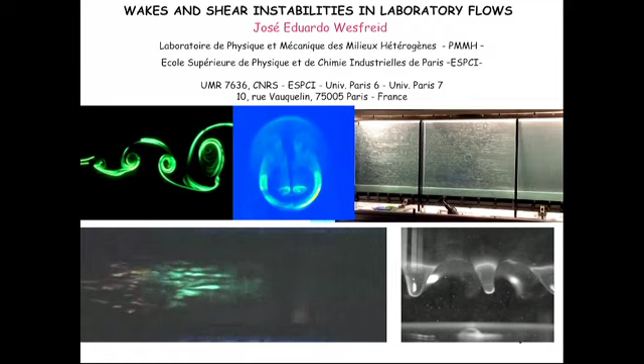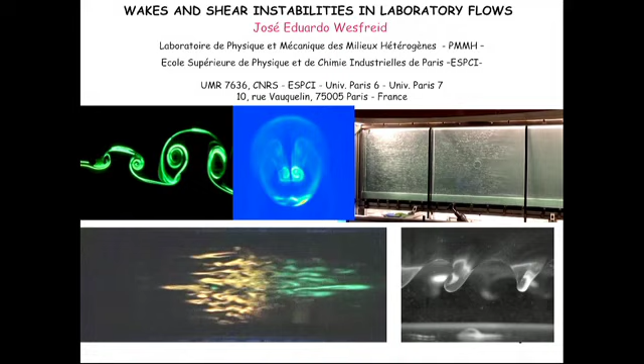As said by Professor Sweeney, my main activity is experimental, so I try to give you an explanation of how we do our experiments and our work.

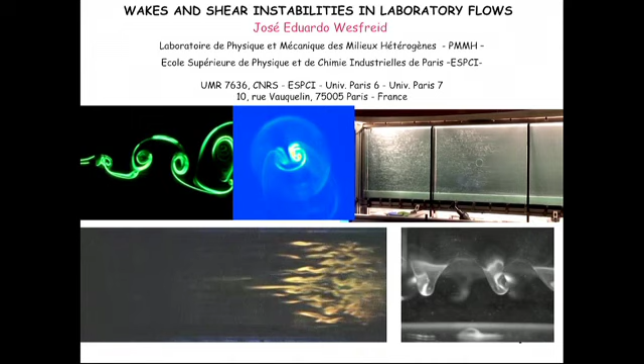So thank you again. I came from the École de Physique et Chimie of Paris, in France. Engineering faculties in French universities are normally what is called the big school. Ours is a small big school because we have no more than 70 students, but many teachers and professors, and we have especially an experimental activity to produce physicists and chemists as engineers, with a lot of innovation.

But also a lot of history, because it's the place where Pierre and Marie Curie discovered radium, and they discovered it essentially because they were very good experimentalists.

With Marie Curie, they found new chemical elements, but essentially because they had in their hands a very strong instrument. This is very important to know, this history of Pierre and Marie Curie.

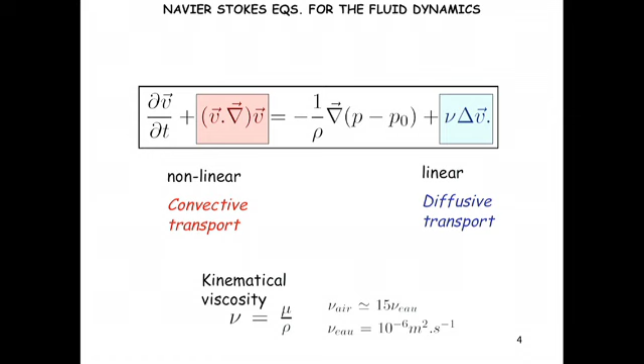So first of all, concepts about typical size and typical times. For diffusive phenomena, remember that the typical distance is related to the square root of the time, with the kinematic viscosity as the prefactor. Kinematic viscosity is the coefficient of diffusion of vorticity, which is very useful for doing problems.

The typical time is the square of the typical distance in your problem divided by the kinematic viscosity. For example, you have a sharp profile of velocity - this profile diffuses with this typical time and typical size.

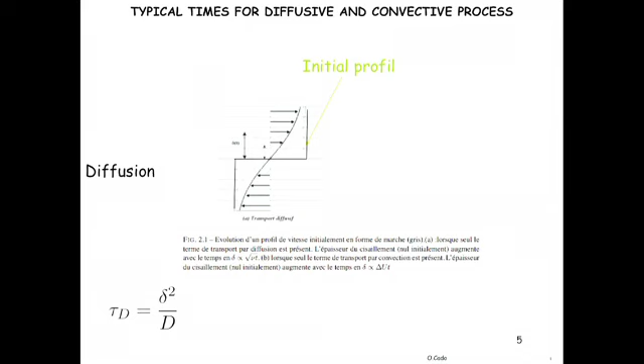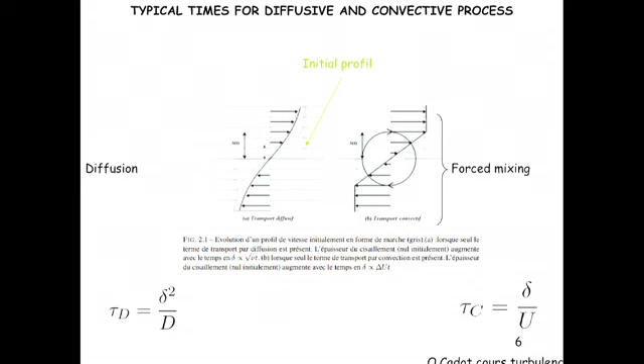For the opposite case, when you have convective phenomena, you have mixing by vortex, for example. Here you need to consider another time, with its typical velocity and distance - for example, the return time of a vortex. With these typical times, we go on to explore all the phenomena of fluid mechanics.

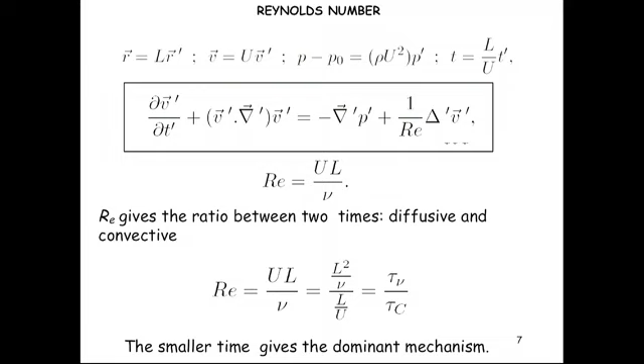If you take the Navier-Stokes equation and make it adimensional with the typical size and typical velocity, you find the Reynolds number, which is the product of the typical velocity and typical distance divided by the kinematic viscosity. This Reynolds number is no more than the ratio of the two typical times: the time of diffusion and the time of convection.

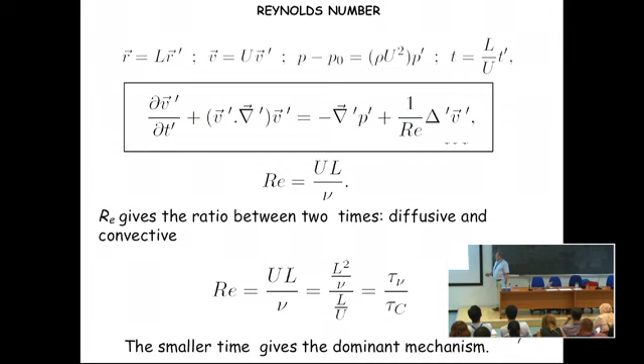For example, if the diffusive time is low, you have low Reynolds number behavior, with more diffusion - normally the smaller time gives the dominant mechanism. This is a small introduction, since there may be people who didn't necessarily take or don't remember the time when they learned about fluid mechanics.

Another important point in fluid mechanics: many times you have strong velocities, you have inertia, and you have separation, especially when you have an adverse gradient of velocity - higher velocity, lower velocity - and you produce this kind of separation. This is a very important problem, for example, in airplanes. If you take a higher angle of inclination of the wings, you produce this separation and have a problem with lift. This is an important problem in aerodynamics, in fluid mechanics.

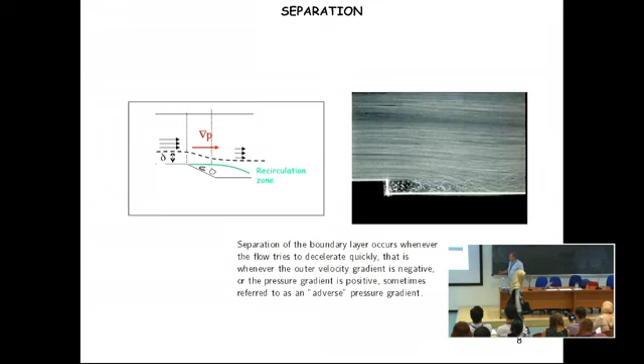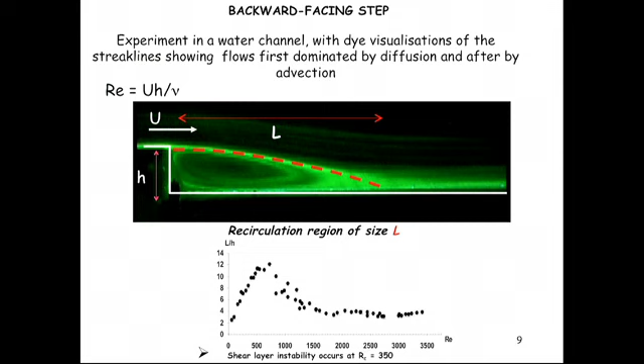So I use this separation to produce fluid instabilities. Here I have a region of dead water fluid with higher velocity here and very low velocity there, nearly slow motion. So I have the condition for flow instabilities.

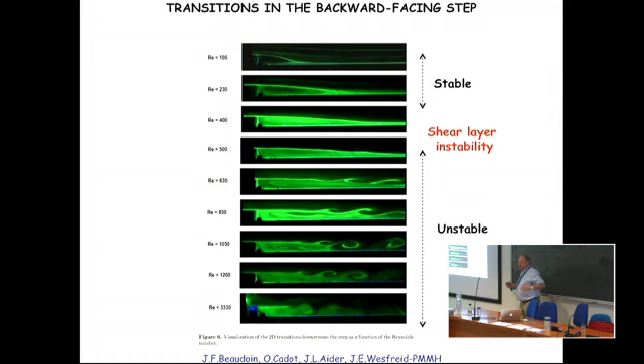If I grow the Reynolds number in this flow visualization in our water tunnel, I can show two important points. First, the recirculation length, the size of the recirculation, grows with the Reynolds number. But at one moment, you have fluid instabilities, and you observe this vortex with vorticity normal to the wall. Then, more intense the vorticity, the recirculation length shrinks. So essentially, the recirculation length grows in the beginning for the stationary flow, and in the end is constant because of this shrink.

How can I understand this phenomenon conceptually? In the beginning, I suppose I have slow velocities, and the diffusive phenomena is more important. So if I have velocity here, by diffusion the velocity comes to this point, the backward facing step, of height h. Higher velocity here, null velocity there. By diffusion, the velocity comes from here until here. What time does it take by diffusion to come from here until here?

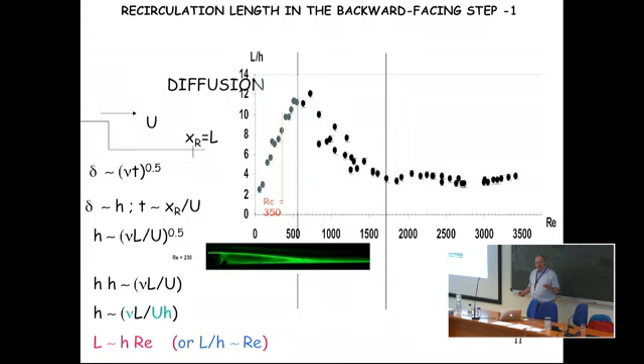This distance is the square root of nu t. Delta is this distance. What is the time? It's the time to go from here until the end of the recirculation length, so it is L divided by U. I put this inside, transform with the Reynolds number, and find that L, the recirculation length, grows linearly with the Reynolds number, which is what I observe. So this diffusive mechanism explains the growth in the beginning of the recirculation length.

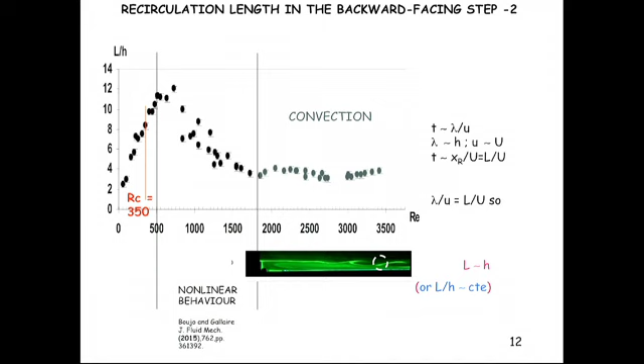What happens in the end? In the end, I have strong vorticity, so the typical time now is the time for this vortex to turn. This time is the wavelength, the size of the vortex, divided by the typical velocity, on the order of magnitude of the free stream velocity, since I have free stream velocity here and zero there. In this time I need to go from here until here, the recirculation length divided by the velocity. So I observe that L is proportional to H, meaning L divided by H is constant.

So I have two behaviors: small Reynolds number is diffusive, big Reynolds number is convective or inertial. But in the middle is the problem, because it's not very clear what the law is in between these two states, and this is an open subject, very active. There's a paper from last year from the group in Switzerland on how to understand this very nonlinear phenomenon, taking into consideration the two extremes.

I spoke about the water tunnel. It's not a tabletop experiment, but nearly. It's the smallest water tunnel in the world. Normally in your universities, a lab of mechanical engineering or aerodynamics has a whole building for a water tunnel. First of all, we are in the center of Paris, and the square meter is very expensive, so our water tunnel is no more than half this size. A small water tunnel you can build in your institute, because if you have a workshop, it's only plexiglass. You have holes and plexiglass, no more than this, and it's very efficient because you can do basic physics and applications.

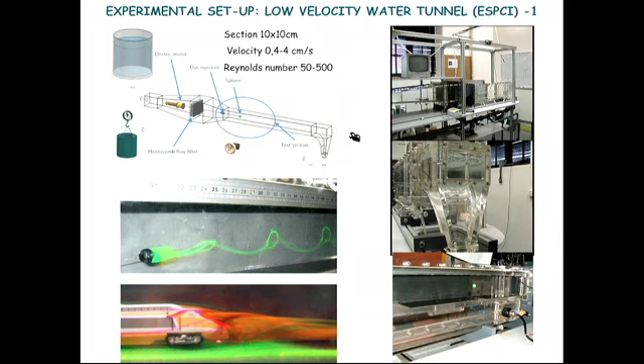You can study many problems with small reduction models, for example flow control in the TGV, the high speed train in France. There's no opposition to this approach, so afterward I can help if you have ideas. There's another small water tunnel at Linköping University, but here's an important point about what you see in fluid mechanics.

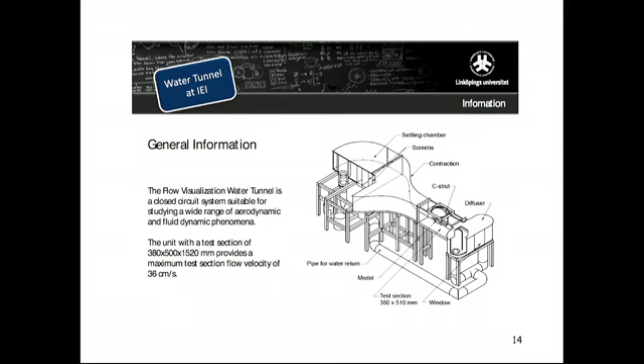Attention: what you see is not necessarily what exists. Bizarre, why? Because one thing is the streamlines. Streamlines are tangent to the velocity vector. In stationary flows, no problem. What you see here with particles, with the trajectory, the streak lines I'll speak about after, is what really represents the streamline. What's important is the velocity.

We use PIV, the method to measure the velocity, and we take pictures. It's very important to try to measure this tangent vector to the velocity of the flow. But what happens, normally we put dye in one point. The dye is transported until here. If the system is not stationary, each time this molecule of dye observes a different motion.

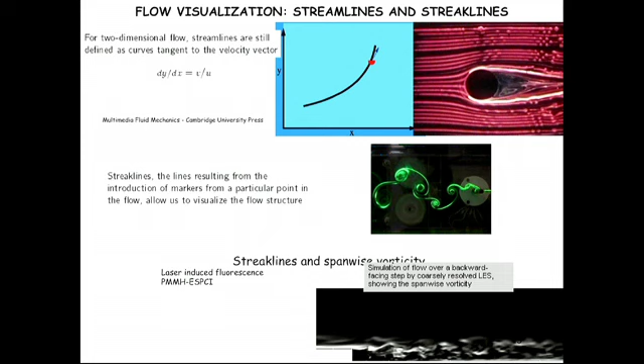In one moment, this dye here was up here, but this particle came from one time before, and this from other times, shorter here. Each particle you see has a history from the exit of the dye until the moment you take the picture. It's very complicated because it's this integration of the past.

There is an unstationary flow. It is called streak lines. Streak lines are not streamlines - remember this. This is a typical error of people doing numerical work, trying to show this. No, you don't show this except you put particles in your code and follow the particles.

But normally, if you like to see what happened, what you see in visualization seems similar to vorticity.

Flow visualization is very old. Marey was working in this, at the end of the 1800s, he built this wind tunnel. He is the same guy who invented cinematography, and at the same time, he was interested in studying the flow, flow visualization.

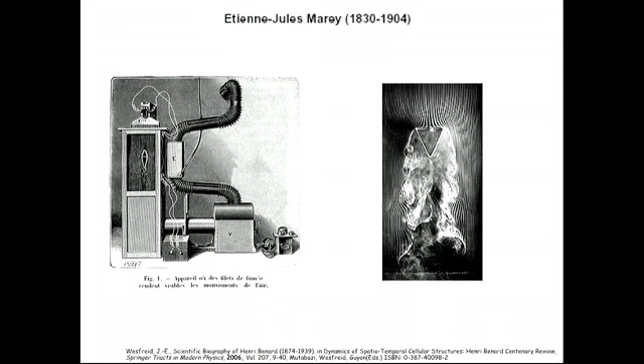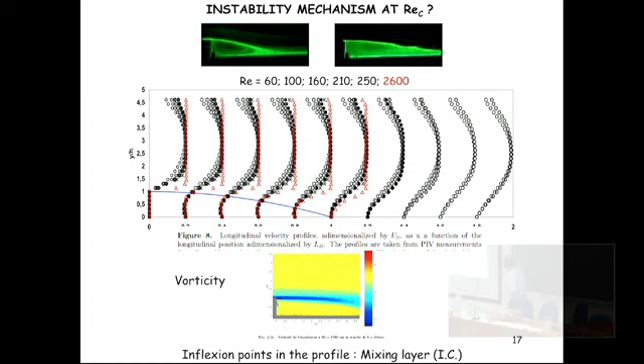I come back to the backward facing step. What happened? I have this profile of velocity, I have this inflection, I have this strong vorticity here, here is the recirculation, the free wake. I try to understand why there are these instabilities.

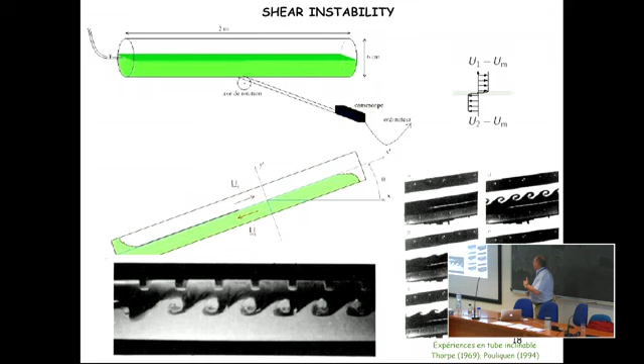This is some kind of shear instability. A typical example of shear instability: if you have two flows like this, you incline this tube, and you can see this typical Kelvin-Helmholtz instability or shear instability. It is very typical in many problems of fluid mechanics.

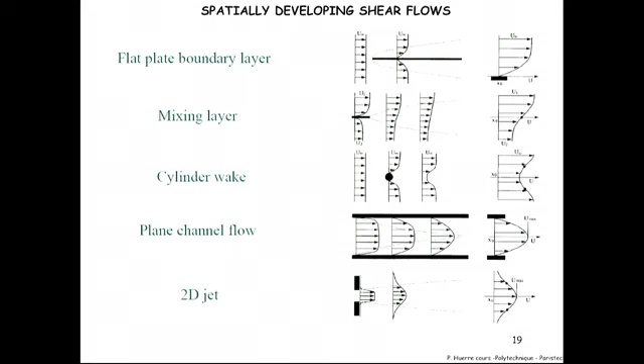For example, many times you have this flow with this strong gradient - in the case of Poiseuille flow, in the case of Couette flow, in the case of the wake after a cylinder, the mixing layer. This is very typical. What you do to study this is study linear stability.

So you take the flow equations, for example the 2D equations, you separate the flow into the basic state, and you add small perturbations. Since the perturbations are very small, you take the linear approximation. That is the linear problem of the Navier-Stokes equations.

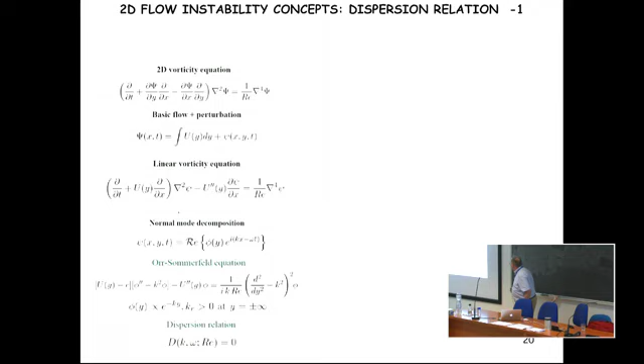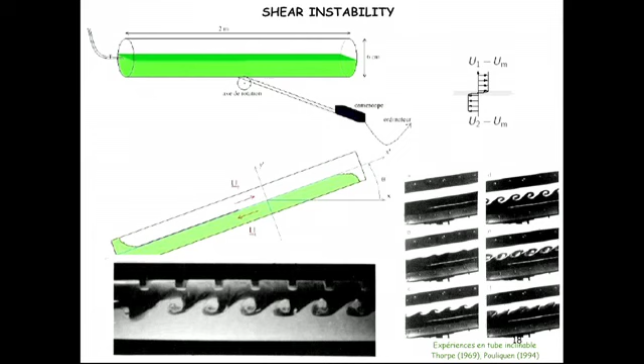You suppose that this perturbation has a normal form - it's a wave, if you want, with a wavelength, or wave number k equal to 2 pi divided by wavelength, and a frequency, an imaginary frequency. If the imaginary part is positive, the flow explodes. What you try to see is the dispersion relation - the relation between the wave number and the frequency for each Reynolds number, to see what happens.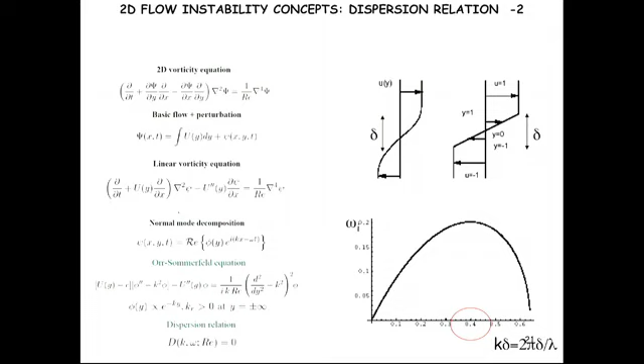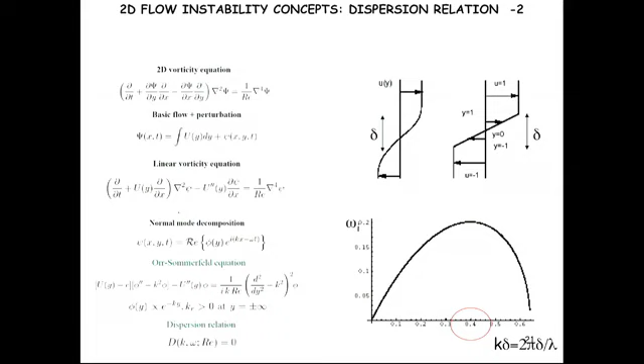So normally I expect to see this wave number or this wavelength. Remember, very important: in almost all calculations for these flows, if I do a hyperbolic tangent here for this mixing layer, normally this value is 0.39, 0.41, very near 0.4. If you need the order of magnitude, remember 0.4 as the typical wave number.

And from this, I go to the more typical problem of vortex shedding, the more typical open flow instability, which is the Bénard-von Karman instability, because Bénard observed this in 1908, and von Karman gave the theory in 1911.

So before Reynolds number 47, nearly 50, you have two stationary wakes behind the cylinder. But at one moment, from Reynolds bigger than the critical Reynolds, you have this alternating vortex shedding with emission of vortices - and this is the important point. This is the cylinder, an infinite cylinder, and these are the vortices.

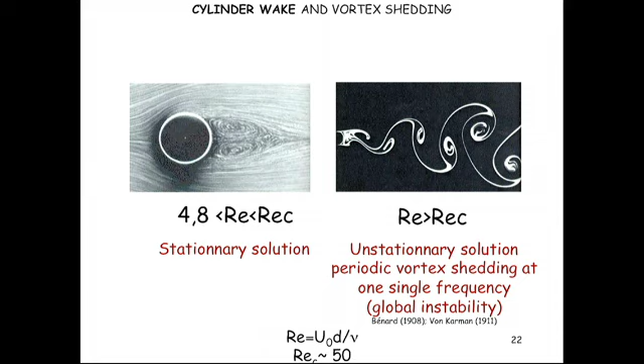The vorticity is parallel to the object, span-wise, not stream-wise. I'll come back to this.

This was observed by Leonardo - a very nice picture of Leonardo, who was observing nature, and nature has a lot of this kind of vortex behind a bridge. You can also observe this by satellite, because with a small mountain you have nearly a 2D problem in the atmosphere, and you can see the emission in the atmosphere with clouds.

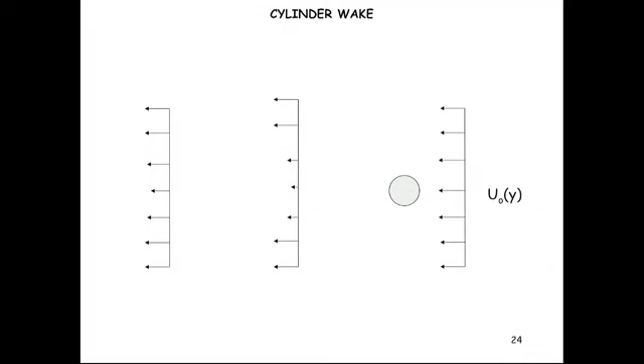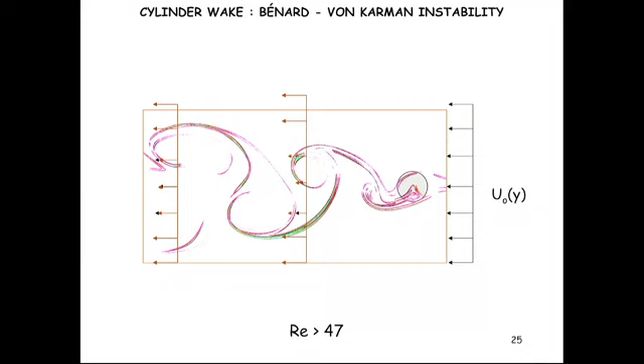So essentially, you have a uniform profile, you have the object, the cylinder, and you have the wake. So this wake produces this shear instability - and this is the instability. An important point: there is a very big change in the basic flow due to the existence of the instability, and this is an important point I need later.

So I have an experiment in our water channel with fluorescein as dye, and you can see it is really a hydrodynamic horloge, a hydrodynamic clock, because they are very clear.

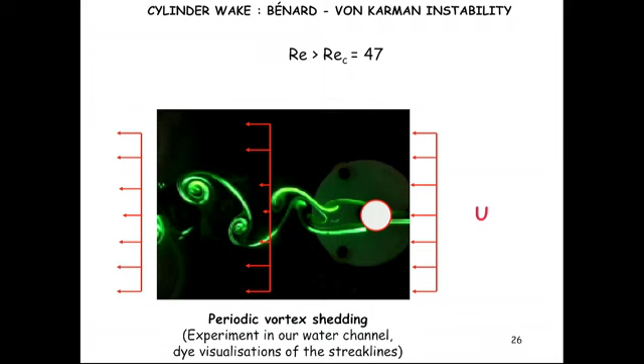This is an absolute instability, very clear frequency, and attention, the wake does not grow until... it is what you observe, what you see. But in reality, if you take measurements, the perturbation grows and after decreases. And the typical size, where the maximum is, is the correlation length in this hydrodynamic instability.

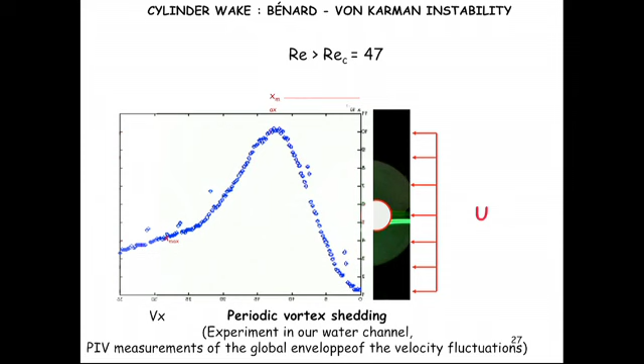So in this case, you have the dispersion relation. I remember one point: why is there a cutoff wave number? Because if the rolls are very big, for example small wave number, the shear is very small, so small growth rate. If the wavelength is small, big wave number, you don't see the shear.

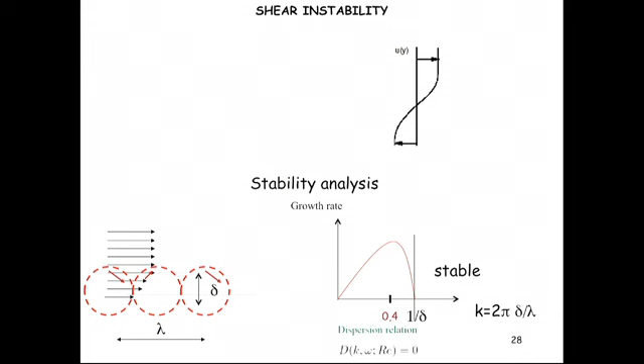So it is the reason there is a cutoff and this part is stable. Another situation, for example, if you have a non-miscible interface between the shear, you have the cutoff given by the capillarity, by example. So the cutoff is given by the capillary wavelength. But here, the cutoff is given by the geometry of the flow.

Order of magnitude of the frequency, order of magnitude. Remember, the 0.4 is the wave number with the maximum growth. So 2 pi delta over lambda. What is the typical size? The typical size of the shear is the half of the diameter.

So you can observe that the wavelength following the dispersion relation of the shear instabilities is of the order of 8D, as an order of magnitude. So if the frequency is the phase velocity over the wavelength, and the phase velocity is smaller than the velocity u, you arrive to obtain that the frequency...

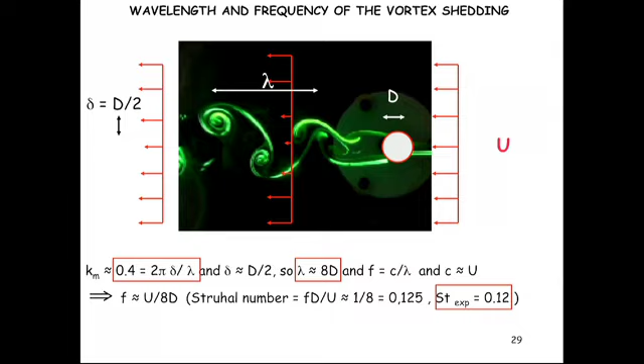...is this value. Normally, the frequency is measured with the Strouhal number, which is the nondimensionalized frequency multiplied by diameter divided by u, is 0.12. It is not exact, but if you have an instability and you observe that the Strouhal number is 1, surely it is not a shear instability.

The order of magnitude, when you have this typical Strouhal number of 0.12, you can do the calculation, so you can observe you are in the right kind of instability. The real Strouhal number is this.

The Strouhal number grows in the beginning from this onset and after is constant, and it is a nonlinear oscillator with the frequency proportional to the square of the amplitude, but the amplitude is proportional to the square root of the distance from the onset. So you have the law of the frequency.

It's important because it's an industrial application. Because if you put in your pipe, for example, a cylinder, and you take a capture of pressure, you can measure the pressure of the vortex shedding, and you relate the frequency to the Reynolds number, to the velocity, so to the flow rate.

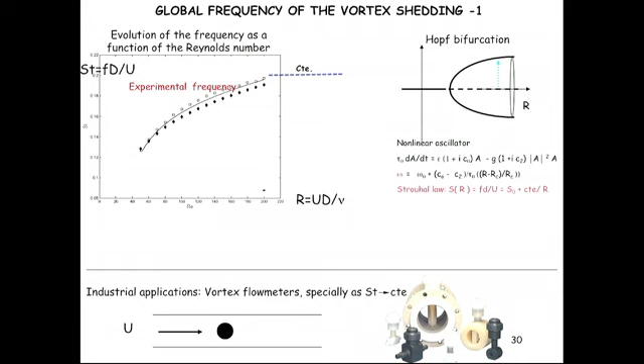As this, you have many, many sensors to measure flow rates in the industry.

But another big problem is, it is what we observe. We observe this frequency. But if you do the calculation of the linear theory, it is this law. So there are discrepancies between the global calculation of the frequency and what you observed.

And what is the reason? Because these measurements are calculated on the basis of the basic flow at each Reynolds number. But I say, normally, the fluctuation by nonlinearities develops what is called a zero mode, a stationary modification of the mean flow. And this modification of the mean flow has a strong importance.

If you do the calculation, as many people do, not taking the real basic flow but the mean flow, you obtain the correct result. This was suggested many years ago by Malkus, to understand turbulence: take the mean flows and do the linear theory, but with the modification. This is a very important subject of discussion today.

And one important moment to observe that these nonlinearities really exist is you see the recirculation length behind the cylinder. What happened? The recirculation length grows, as I showed you before, linearly with the Reynolds number. And afterwards, the instability begins to shrink it.

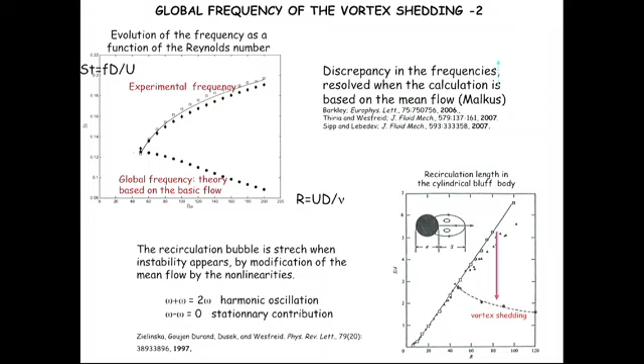And the difference between the length before and this length is due to the fact that, as the perturbation grows, it puts an additional mean flow that stops the recirculation. And this is the more macroscopic effect of the nonlinearity. You can see this, okay, the strong reduction.

One point about force. This vortex produces force on the objects. You can estimate, if you take, by Saffman, the moment of vorticity in the vortex street, and approximate the velocity, the force is proportional to the derivative of the product of the circulation and the distance to the central line.

So bigger is the circulation, bigger is the force. Smaller is the distance to the central line, smaller is the drag, for example.

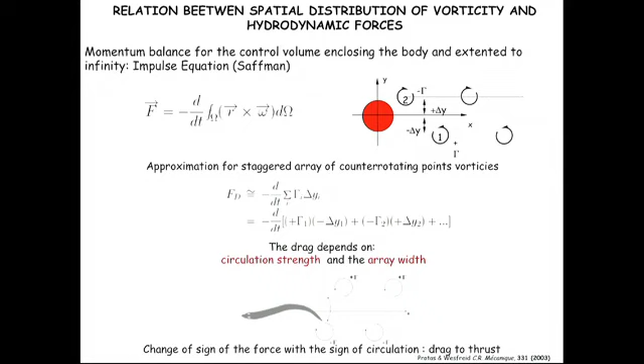By example, if you change the sign of the circulation, you change the sign of the force. And you are in the case of fish propulsion, because there is the emission of vortices, but reversed by the Bénard-von Kármán street, which produces drag. But if you change the sign, in this case you have not drag anymore but thrust, okay?

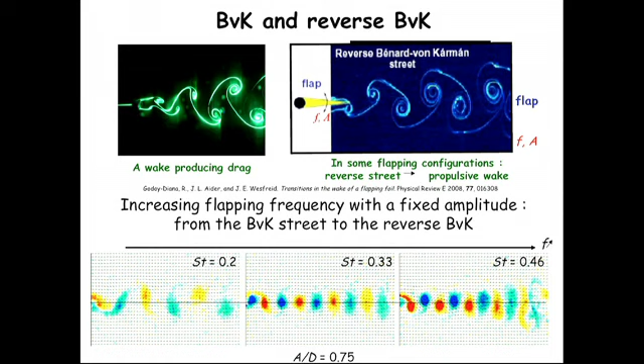And this is interesting because what happened? Many birds have a Strouhal number calculated about the amplitude. You take this amplitude of the flapping, multiply by the frequency and divide by the velocity. Almost all birds are around 0.2.

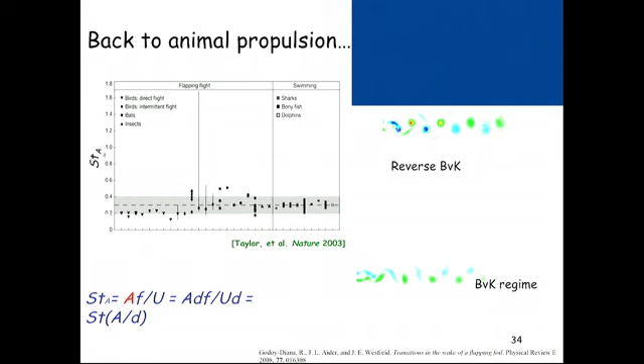And what happened? We have measurements with some flap, okay. So in this kind of frequencies we have the Bénard-von Kármán street, but we can observe for higher frequency this reverses. And this reverse, we can measure the force, and this is the line which changes from drag to thrust. And this line is at Strouhal 0.2, as observed in nature.

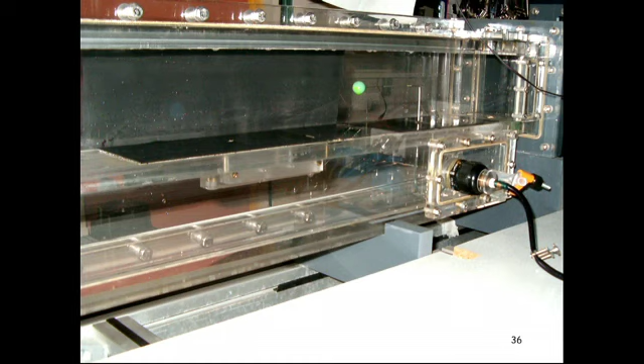I spoke about vortex shedding, about, if you want, two-dimensional objects. But what happens when the vortex shedding occurs behind 3D bodies? By example, a sphere. I go to my water channel, I put a sphere here, and we try to study what happens. First of all, I compare the 2D problem to the 3D.

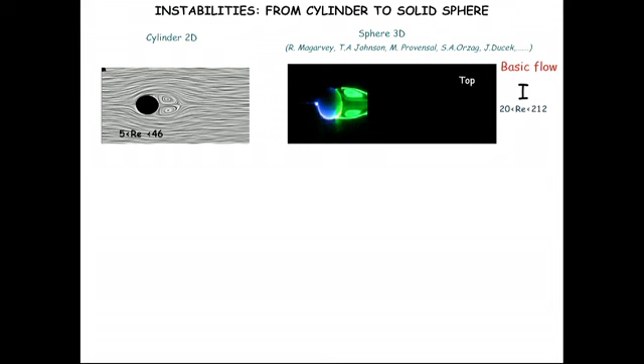In the 2D case we have two recirculations. In the case of the sphere, I have a torus of recirculation, an azimuthal recirculation. At one moment, this azimuthal recirculation loses symmetry. One part of the torus, by example here, is bigger than this other part of the torus. And this produces two counter-rotating vortices, stationary.

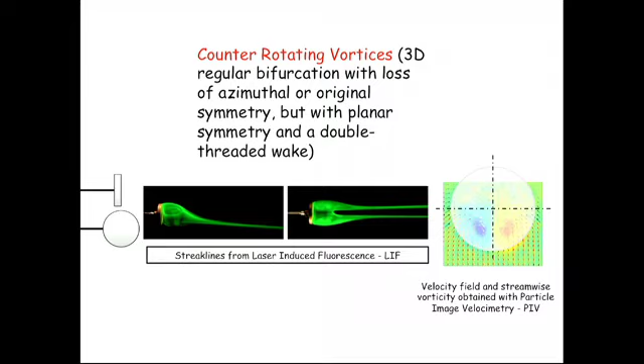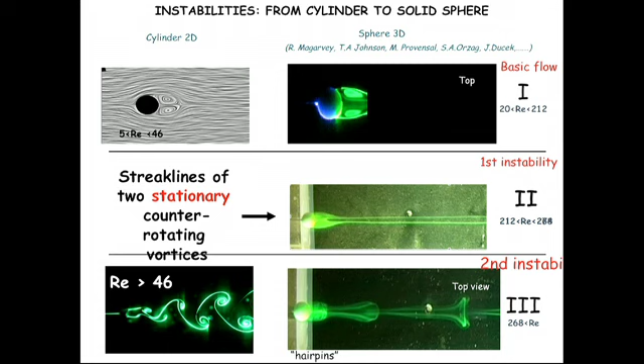So the first instability in the case of a sphere or a disk is the existence of the breaking of the planar, the axisymmetric symmetry. And I produce two counter-rotating, very weak, small vortices, okay? And after this, this is the situation, for example in the case of the sphere between Reynolds 212 and 270: this stationary instability, and after we have vortex shedding in the form of hairpins, okay? And this is what you observe.

This is the typical hairpin, okay? So you can see from the side, from the top, or in front, okay. It is the typical vortex shedding.

One important point for fluid mechanics: what is important in the hairpins is the legs, this part, because these legs mix very well. The head of the hairpin seems not very important. I say seems because it's a very strong discussion today.

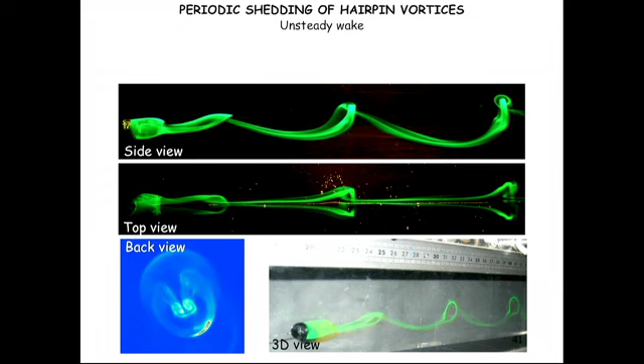To give an idea what happened, perhaps you can see it in drops falling in water. Imagine a bubble, it's a sphere, I suppose the bubble is rigid. So in the beginning the bubble grows, the Reynolds number grows until 212, and the two counter-rotating vortices appear to produce lift. So this lift puts it at an angle. So the bubble arrives here and deviates here, stationary.

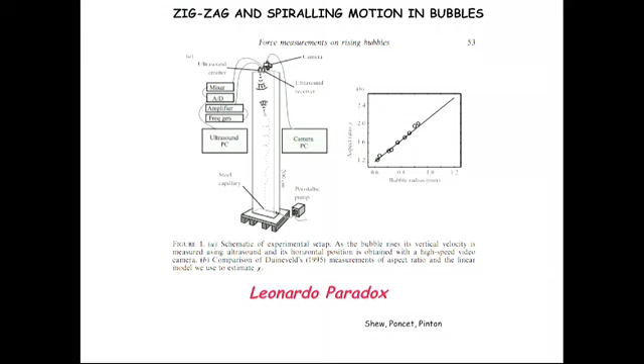And after, there are the hairpins. So I have the zigzag, and a higher instability is this kind. So you can observe this when you have a drop, this sequence of instability. Perhaps you can observe this in a bottle. Okay? Good.

And then, it's important because I come back to the head. Now we have experiments where we turn the sphere, because the interest is to study wind turbines, okay? So, but it's very similar, okay. The interest is, and what happened here is...

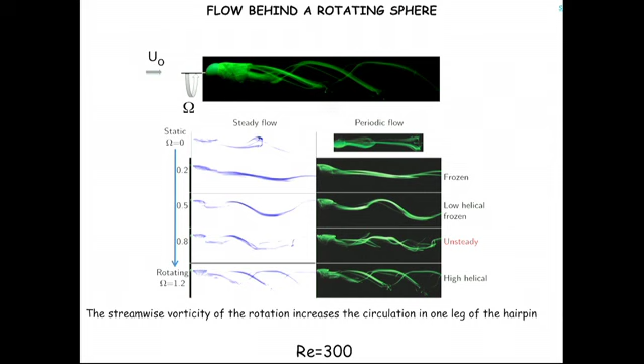If I put rotation, I add vorticity at one of the legs and diminish the other. So the hairpin disappears and you have a helical mode. And almost in this situation, the hairpin is a very short region, and you have different helical, higher order helical modes. Okay, good.

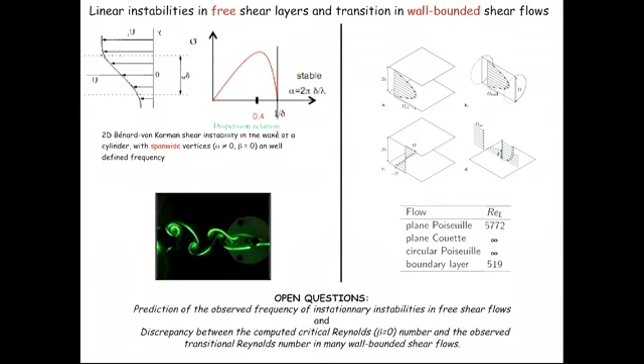Attention. Is what I explained valid all the time for all shear flows? No. Because if I apply this concept to Poiseuille flow, plane Couette, pipe flow, even boundary layers, what happens is you can calculate the critical Reynolds number. By example, in the case of plane Couette, it is stable all the time. In pipe flow, it is stable all the time.

But in reality, you can observe critical transition at Reynolds numbers less than the linear prediction, even if linear theory says it's all the time stable. This is because there exists subcritical transition to turbulence with the existence of very localized structures, spots. It is one spot in our channel. These spots essentially have streamwise vorticity, not spanwise like the Benard von Karman vortex. And they are sensitive to finite amplitude perturbation.

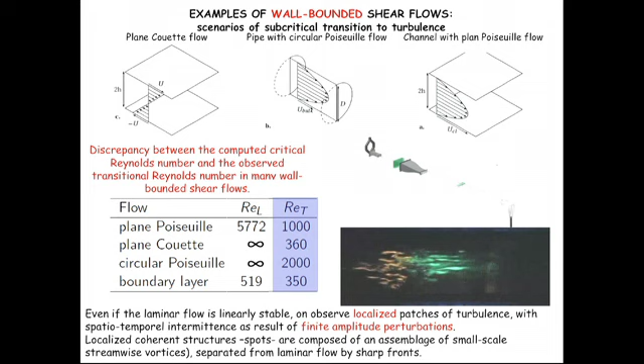So in the case of wall-confined shear flows, we have a different situation. Why? Because near a wall, I have a strong gradient, and the streamwise vortex mixes, putting high momentum from here to the wall and the opposite. It's not the same scenario I discussed at the beginning with the Benard von Karman case.

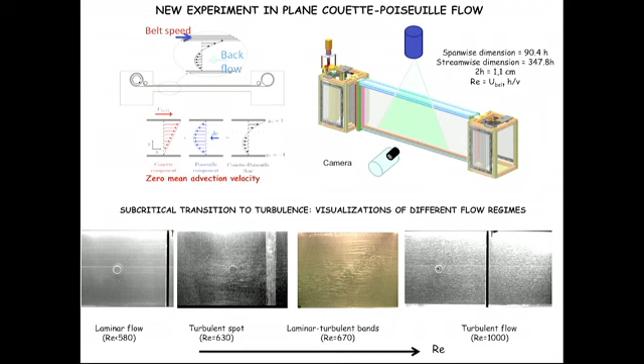This is the reason why you have a very different situation even with shear, due to the existence of wall bounding. Now we do an experiment to produce Couette-Poiseuille instability. We have a moving belt here and a fixed wall here. The Couette flow pushes water from one side to the other, it comes back, and we can see laminar flow, the existence of spots, bands, or full turbulence - this is one of the subjects used to understand the existence of these kinds of transitions.

Another important point about streamwise vortices is what occurs in reality - take an object like your car. Behind it you have a spanwise recirculation, but like the sphere or the disk, there are many very strong streamwise vortices behind your car. These, behind, are weak in circulation, but they're important because 45% of the drag, the pressure drag in your car, comes from the vorticity behind it.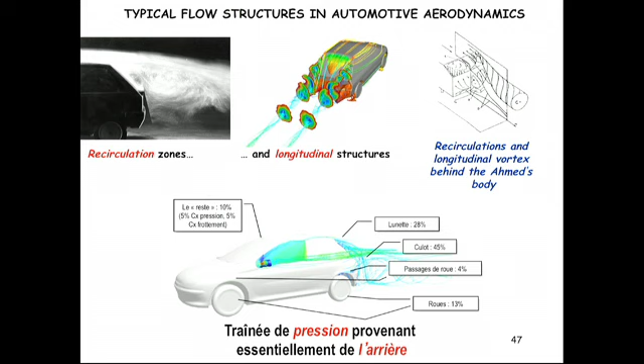So it's important to modify this hydrodynamics. For this, we can put counter-rotating vortices using vortex generators. For example, we have here a solid vortex generator which produces a pair of counter-rotating vortices that interact with the body to modify these big structures, with a very important effect.

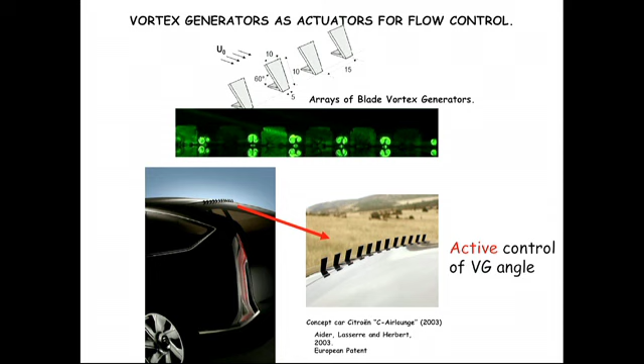Normally you cannot use this solid generator on a car, but you can put a jet in cross flow - you blow, and this jet produces two counter-rotating vortices. This is what is used today as the vortex generator applied in MEMS, in very small apparatus.

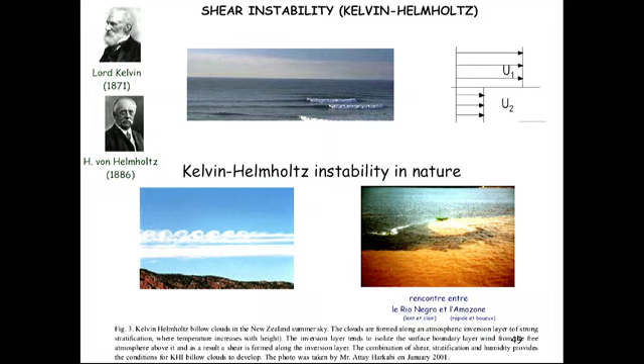To finish, I come back to the Kelvin-Helmholtz instability, shear instabilities. I said before the cutoff was given by the size of the boundary layers, but if you have an interface, the capillary effect doesn't like to have a very small radius. So I will show you a Kelvin-Helmholtz instability and shear instability, but with an interface.

I will produce this in the following way: I have two immiscible flows, water here, and on top a very viscous oil, and I try to produce an oscillation. What happens with this oscillation? I generate a Stokes layer. You know, by skin effect, when you have oscillation proportional to the frequency, you can induce a wave boundary layer - inversely proportional, the higher the frequency, the smaller the thickness.

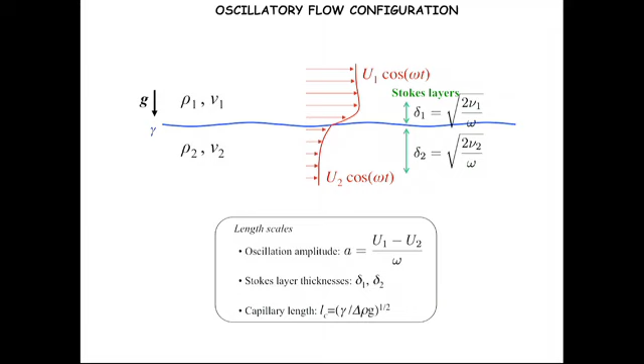If I can produce this, now I have a shear instability, even as a function of time, and this shear instability produces the frozen waves. It's an easy phase - what's the reason? Because the oil here is very viscous, it has a big wave boundary layer, so it turns with the reservoir, with the box, while the other fluid does not. So it's equivalent to shearing one layer against the other, but with nearly no motion. It's very easy to do.

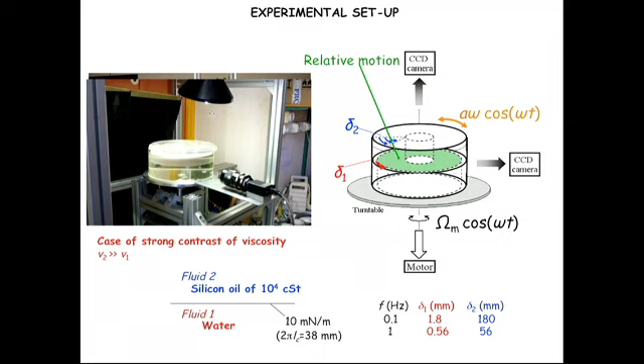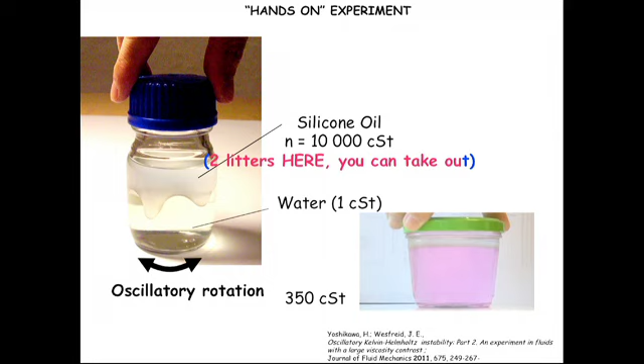If you take this and observe what happens here, perhaps after you turn it, you can produce it. We have here 2 liters of this oil. If you want, you can take this home to your lab and build this small toy to show this kind of surface instability with Kelvin-Helmholtz.

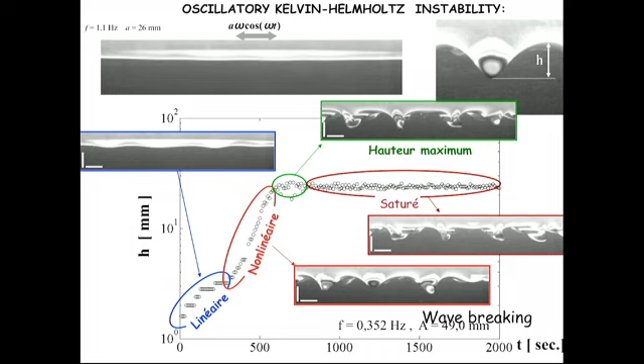It's interesting because with this kind of instability, you can see the linear phenomena, the nonlinear, the saturation, and even the very interesting problem of wave breaking. For example, the finger-like pattern doing this is very similar to the problem of wave breaking, and we study now how the typical distance varies as a function of time, comparing with recent theoretical predictions.

You can do even the same with sand - you have sand, water, and you can do this, but in this case it's not a shear instability, rather you arrive at underwater dunes through modulation of the interface with the same concepts. I think with this you have an idea of what you can do with flows, even if they're not exactly tailored experiments - in many cases, yes, but I suggest you build your own water tunnel in your laboratory.

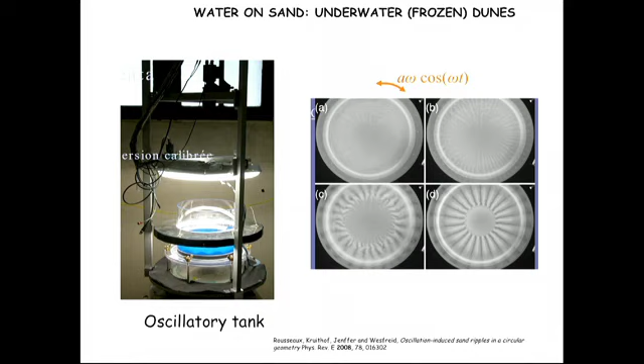To finish, I am very happy today, even emotional, because I was studying in Argentina, in Buenos Aires, and one of my teachers was Giambiasi, and here we are in the hall of Giambiasi. So really, I am very moved. He was a fantastic teacher, and he is very recognized - this lecture hall is named the Giambiasi Hall. So it's a good moment for me. I was a student here. Giambiasi was my teacher of thermodynamics, many, many years ago. Thanks to all my collaborators of the laboratory.